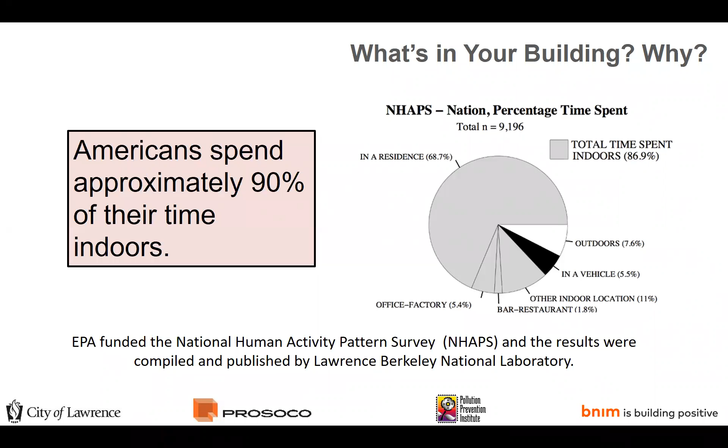Health experts estimate that indoor air quality places more than 40% of the US population at risk for serious health impacts, and that can include asthma and respiratory disease, cancer, cardiovascular disease, and may even cause neurodevelopmental and reproductive problems. Next, please.

Our buildings can have contaminants move inside from outdoor sources and also from building components, the building materials, equipment, and emissions from different types of equipment that are in the building, as well as components and furnishings of the buildings. There are also other indoor air sources depending on the type of activities that go on in the building.

Synthetic chemicals make up the primary components of our construction materials, furnishings, and consumer products. It's estimated that less than 5% of these industrial chemicals have ever been evaluated for toxicity and bioaccumulation, and in many situations, there's insufficient health data to understand their effects on human health before they're even used. Studies indicate that some chemicals may be harmful to humans at doses that were once considered negligible.

Indoor air makeup can be a complex mixture of hundreds of chemicals, and chemical-laden dust particles can also be a concern in what is in our buildings.

Controlling the use of pollutants at their source is really the best way to do this. You really can't make sure that all of the indoor pollutants are eliminated, except that you can take a look at what's being used for materials, furnishings, and finishes when you start to put your equipment and materials in a building, in a new building or even existing buildings.

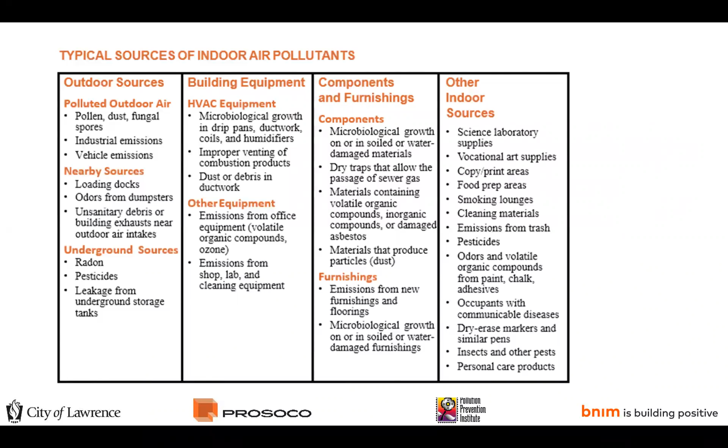To fully understand material transparency, you really need to understand a little bit of context as to where we've been with the laws and regulations in the United States. Also, individual states have some of their own, and voluntary initiatives are important. Why don't you switch the slide next, please?

We all remember some of the regulatory situations that happened in the 70s and through up until the 2015 years. We had asbestos identified as causing problems for people. Lead in paint, indoors and outdoors, were identified. And also mold has been found to be impactful for people's health.

The asbestos rules, many of those rules came about by controlling the different types of uses for asbestos. While it wasn't banned, the uses have been controlled. There's also lead paint requirements for homes and buildings, particularly anything prior to the 1960s. And then also, there's not really very many regulations regarding mold.

But what really came about in the more recent years, a lot of this was because of some devastating hurricanes that happened. We had to have significant construction in the Southeast with Hurricane Katrina and other hurricanes that devastated those communities. Because of so much construction going on, we had to bring in trailers to provide extra housing for people in those communities, and we also had to have a lot of drywall to bring in for construction.

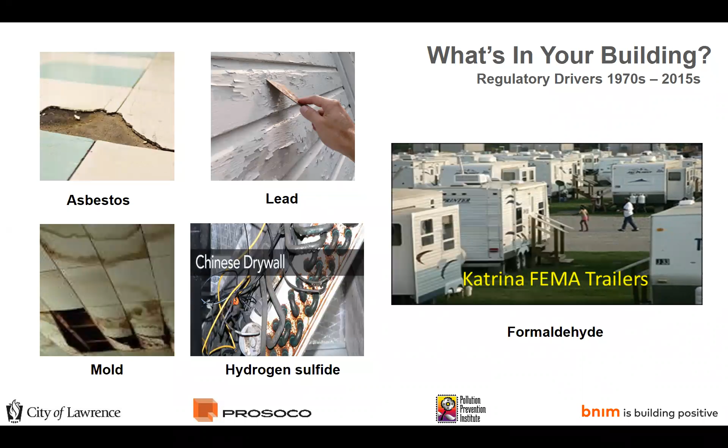In more recent laws regarding indoor air quality and what's in your building, the Federal Trade Commission updated the Green Guides in 2012. With that, they required manufacturers to no longer say there is zero volatile organic compounds in materials. They had to be fair and have proof into what sort of claims manufacturers were making with their materials. The Toxic Substance Control Act was reauthorized in 2016.

California, New York and others passed new laws and regulations about toxic chemicals and transparency, wanting people to be aware of what was in the product as far as labeling, and this included cleaning products. So in 2018 and 2019, California passed the new cleaning transparency law. California and New York are important because they have large populations that command that manufacturers do this all over the United States, because so many products and materials go into California and New York. That's why it's important for Kansas and other states that may not have rules and regulations -- California has a big impact on manufacturers all over the United States and outside of the country.

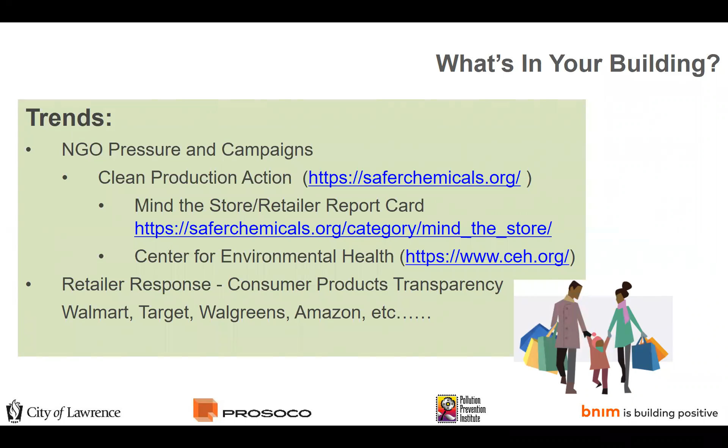Now I'm going to introduce Jeremy Knoll and tell you a little bit about his background. He is the project manager at BNIM in Kansas City. He's got a deep passion for green building and social equity, and he's worked over 14 years on a variety of projects as an architect, including high-rise hotels, a zoo's master development plan, a LEED Platinum Crime Lab, the Space Shuttle Museum at the Kennedy Space Center, and has been a sustainability leader on over 50 LEED certified projects. Jeremy is the chair of the Central Plains chapter of the U.S. Green Building Council. He has a BS degree in architecture from Washington University in St. Louis and a master's of science degree in architecture from K-State. So I'm going to turn it over to Jeremy.

Thanks, Kay. You can't manage what you don't measure -- that's a phrase that rings pretty true for this presentation. Starting in the mid-2000s, the architecture industry became very aware that buildings use over half of the electricity and a third of water in America, and are responsible for nearly half of the carbon emissions as well.

So the results of following this system are really here on the right. Just to run through a few of these: there is a cost to register, certify, and document a project, but the savings are enormous. You see a 30 to 40% average savings on energy and water in a LEED building, a 2 to 10% increase in employee productivity, and the big one to me is absenteeism—more than a third reduction in absenteeism in LEED certified buildings. The idea is that if your people are present in your office building or school, they're being productive, and the money you're spending on the people in the space is really maximized. That's where most of the benefit comes from for LEED and green buildings.

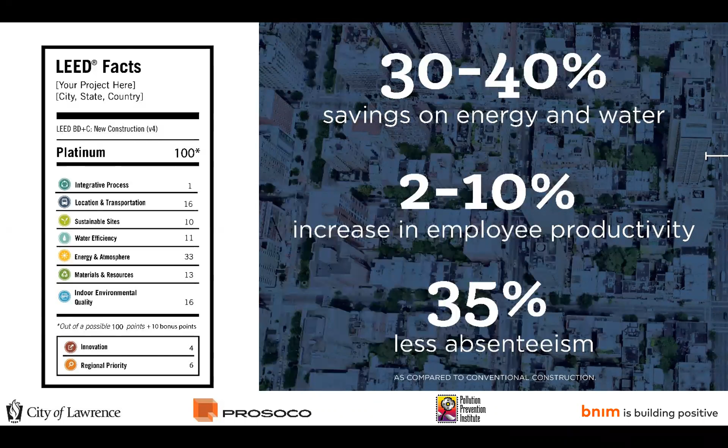Starting in the 70s, when we had an oil crisis, we started working at the beginning of the EPA and looking at energy efficiency in buildings. Without a lot of thought, we started closing up and being more careful about the weather envelope of our buildings, without understanding there was a lot of toxins in the materials themselves within those buildings. So we had a wave of what was called sick building syndrome, which became a health issue dealt with by LEED and a focus on energy and increasingly on healthier products that go into our buildings.

To break down what we're talking about with healthy products, there are really three types of what are called volatile organic compounds. You can think of a VOC like the new car smell—essentially chemicals off-gassing from glues in the various materials making up the interior of your car. Those are airborne, volatilized compounds that are then inhaled. That's where you get the smell, right?

You can also think of a new building that maybe wasn't LEED certified, where you can smell the carpet as you're walking into that space. Those are typically VOCs that are essentially gaseous and inhaled, and typically are carcinogenic or have other issues associated with them that are very bad for your health in the long run. So LEED really opened our eyes to VOCs as something to address.

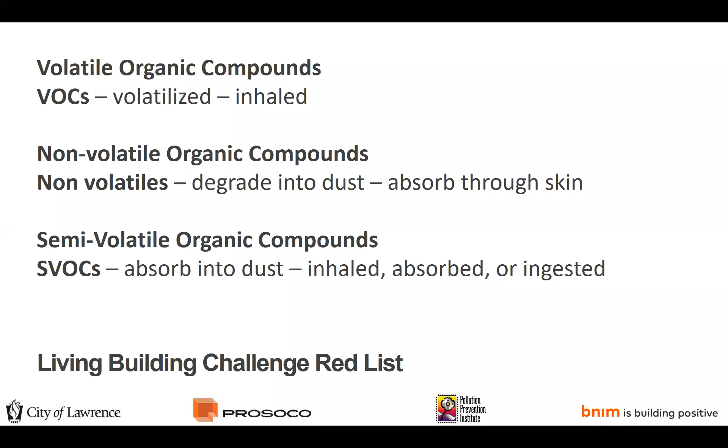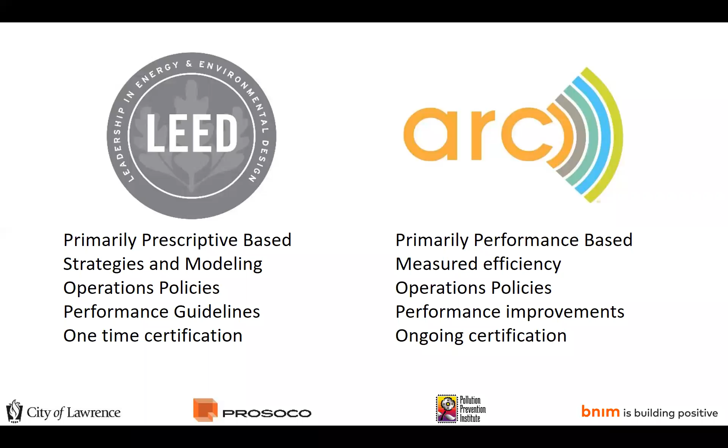There's a new system out now called ARC that is performance-based, so it's about measuring a building as you go along through a calendar year, where you're measuring the efficiency of your utilities, creating operations policies that are measured over time, and doing things like air quality tests in an ongoing way so that you can start to see the life and performance of your building and end up getting an ongoing certification.

Jumping back to the red list here, this is really the list that combines a whole host of other primarily government agency reviews of chemicals of concern and consolidates them into a single list of materials that should be avoided in terms of building products, paints, sealants, and so forth.

And so this is a pretty long list, but I want to point out 4 of these in particular that are the most common offenders and really the most difficult to remove from a building right now. There's not always a great alternative in the building products yet, but these are ones that we find we just have to spend a lot more time looking out for and being careful not to include when we can.

So chromium-6 is the first one to point out. This is a material that is pretty pervasive in our buildings. It's part of everything from drinking fountain piping to sprinkler piping. It's really the chrome plating that goes into stainless steel and other metal products, and there's just not a good alternative for that yet.

Next is formaldehyde. Formaldehyde actually is a naturally occurring chemical that is part of wood and wood products, but we tend to use it as an additive to blended wood products as a glue, essentially, or something to help bind materials together. And so we end up using a lot more of it than we should. Beyond just the background level found in wood, it becomes extremely toxic, and it disrupts all sorts of parts of the human biology.

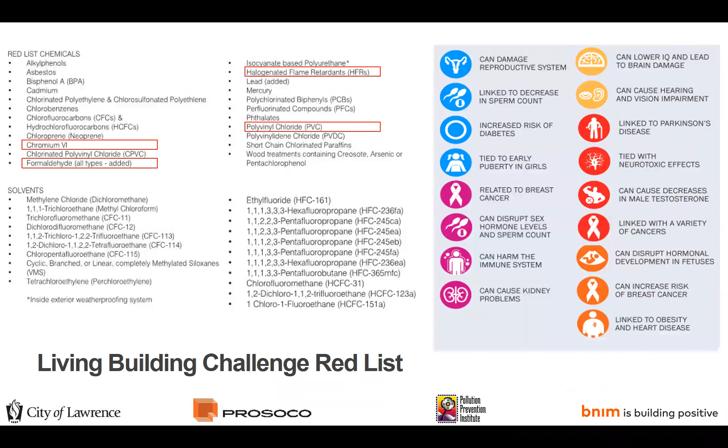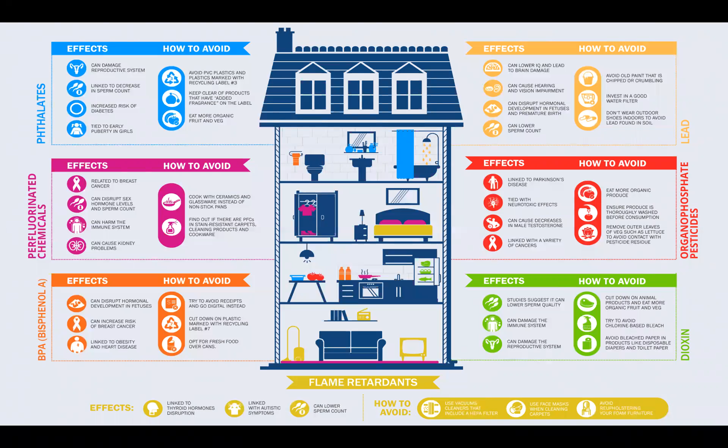So we really have two emerging tools or systems now that we're looking to increasingly help us understand what's in our buildings. First I'll go through is Declare, and then the second is the health product declaration. These are doing very similar things to each other, but in a slightly different way. The Declare label provides a top to bottom list of what's going into a building product, but it gives some additional information as well.

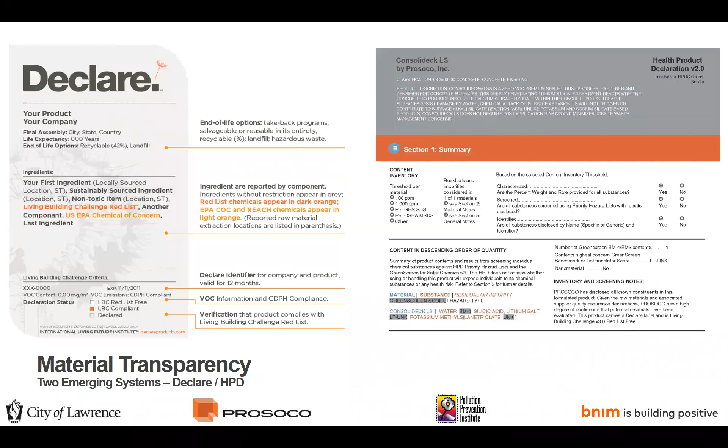This is actually a PROSOCO product that is health product compliant through this system, but it essentially discloses the chemical makeup of a product in a way that makes it easy for me as an architect to review and understand that it's doing the things I need it to do before I'll really allow it to come into a building I'm working on.

I'll end my section talking about certification and the importance of third-party certification, whether in your building products or your building as a whole, because it's about transparency, it's about proof. It's much easier for me, as an architect, to guarantee or protect a building from including chemicals that an owner might not want, and to make a building perform the way an owner wants it to, if we're pursuing a certification that gives us the ability to really measure the results of what we're doing.

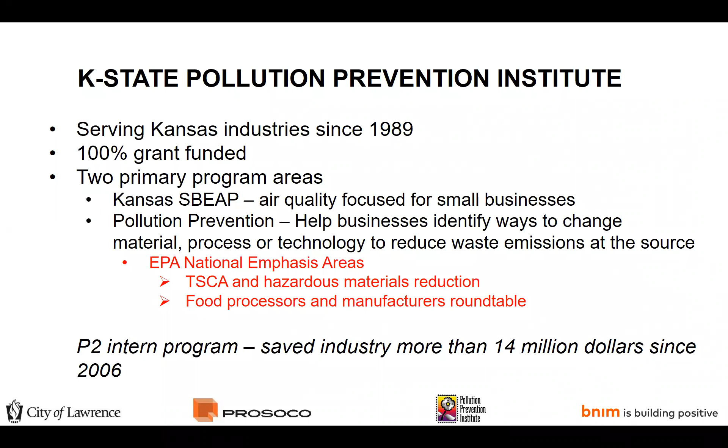The purpose of this program is really to take our university students—most of them, 95%, are engineering students at the junior, senior, or this year we had quite a few at the graduate level, but they're engineering or environmental science students. We've got host industries who have dedicated pollution prevention, source reduction projects, and we bring all that together to ultimately reduce those costs and those emissions for the state of Kansas and for the industries.

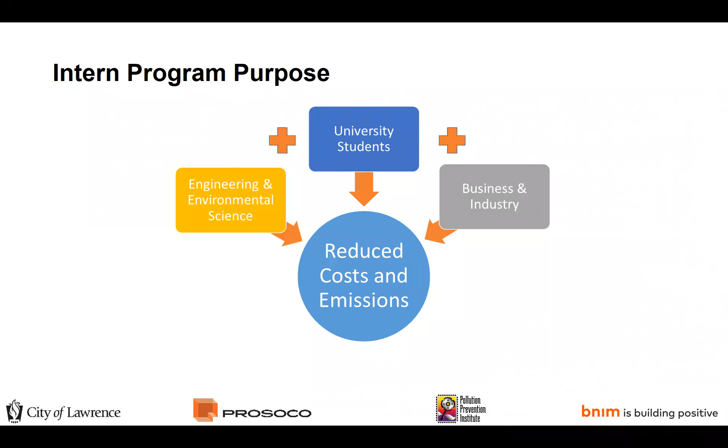And a lot of times that can also equal reduced regulatory burden as well. So if you reduce your VOCs, your hazardous air pollutants, because you've maybe gone from a wet painting process to a powder or a higher solid, you may have also reduced your permit, your air permit level with the state of Kansas.

So why interns? They're able to take the time to tackle these projects. They come in with fresh eyes, and one of the big things we train them to do is simply to ask why. Why is this done this way? Why are we generating this waste? Where did it come from? A lot of times what we find the answer is from industry is, well, we're not sure, but we've just always done it that way.

So they are able to take the time that you aren't able to dig in and trace the process back, put all the elements together, and then do additional research to, like I said, put a case study together for you—do we want to change this process? What are the recommended processes? How much is it going to cost, or how much is it going to save? So it gives you a great place to start.

Many times they're able to implement some of these recommendations right while they're on site. So these are not students who rewrite manuals—these are students who get in and do measurements. We've got quite a bit of equipment that we loan out to the students that they can use for testing water flow, ultrasonic leak detectors, thermographic cameras, that type of thing, and they're able to pinpoint where leaks are and where the savings can be found.

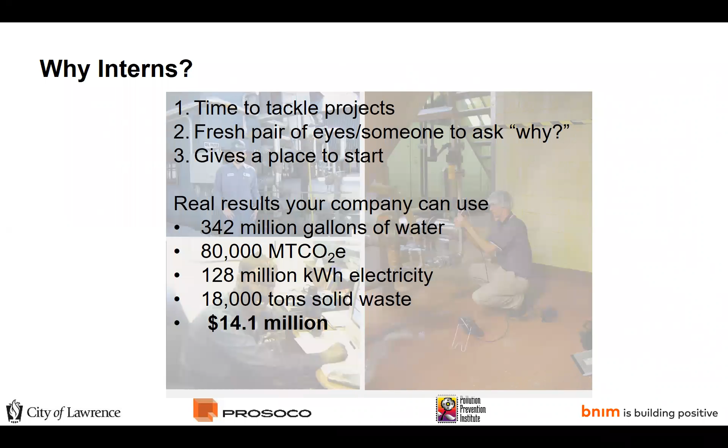These are the results you can see from our program: 342 million gallons of water saved, over 80,000 metric tons of CO2 equivalent, and about $14 million in cost savings.